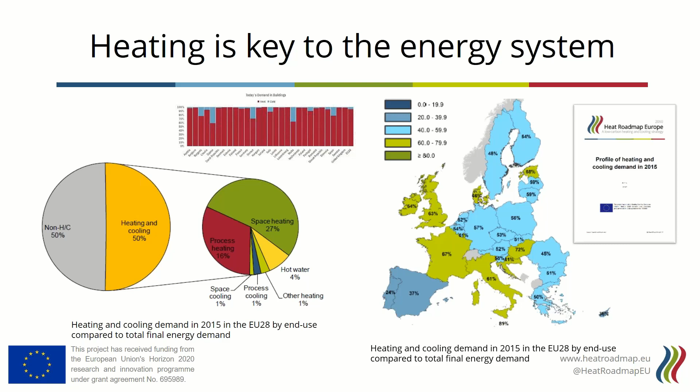When we talk about heating and when we talk about cooling, these are not regionally bound issues. These are issues that are common across the entire European Union, and therefore issues that need addressing within the decarbonization of the energy system throughout the European Union. We've worked towards that, and through different models and different methodologies, we've created these roadmaps for 14 of the European countries, and those represent about 90% of the heating demand and 85% of the cooling demand.

The main conclusion that we've really come out of that is that it is possible to decarbonize the European energy system with particular regard to the heating and cooling sector in line with the Paris Agreement. We do this using only technologies that are currently known, that are currently available, and that are used in different parts of Europe at the moment. So this is a generally optimistic message, especially in light of the IPCC report in the last few days and weeks.

This is an important finding. It's possible. We're not completely lost, and there are options available to decarbonize the heating and cooling sector. These options have a similar cost to other decarbonization factors and are more efficient than... can bring a high level of efficiency depending on how you achieve that.

In terms of the heat roadmaps, there are 3 basic pillars of the scenarios that we've developed. Because heating is local, those differ for urban areas and for rural areas. What we recommend everywhere is a deep level of energy savings in the built environment, but also in industrial processes. We'll talk a little bit more specifically about that later, but overall, we see that we're somewhere around 30% less than today in terms of space heating, which is a high reduction compared to what is currently within the policy and what has happened in the past, but is something which is in line with most recommendations towards the decarbonization of the heating and cooling sector.

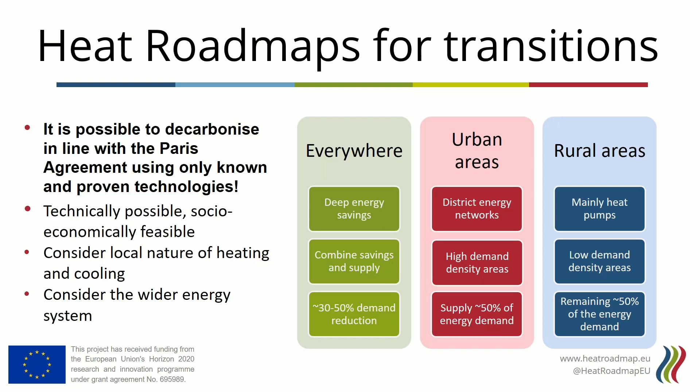So to bring that into some more detail, we'll talk today mostly about what we've broadly called the gas-dominated countries. When we talk about the current usage of gas for space heating, there's a wide range in Europe today. There are countries where there is no gas being used in space heating, and the highest level is in the Netherlands, where almost 85% of the space heat is derived from gas, and particularly from gas boilers. So we'll focus today mostly on the Netherlands and the United Kingdom, because these are the areas where the gas use is the highest for heating.

So based on these, let's talk a little bit about gas for heating. There are some obvious examples, especially in the Netherlands and the UK, where the infrastructure is very much already in place, which also means that there have been long-term investments that have been made in order to put those gas grids down and enable them to be there. These are long-term investments, and from a transition perspective, it makes sense to keep using these. Once you have the pipes, then the pipes are available.

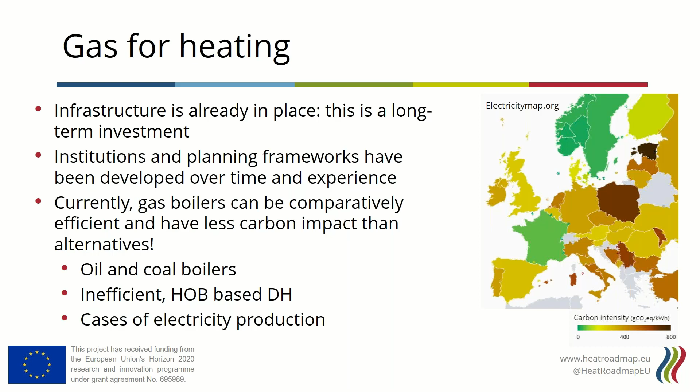So there's a good reason that gas is used in many countries, and there's a good reason that it's being considered as we move towards decarbonization. But at the same time, it's not something that in the heat roadmaps we use a lot, because there are some issues as we move towards deep decarbonization scenarios. The first is the obvious, that deep decarbonization requires us to get rid of fossil fuels to the largest extent possible, and gas is a fossil fuel in its natural gas form.

As we look specifically at the Netherlands, this is maybe not so much of an issue for other gas-dominated countries. There are extraction issues, and that's been a large part of the driver in some local cases to start looking at alternatives and start looking at different ways of providing heat. There's a large geopolitical incentive here, which rises every now and then. But in 2016, we imported 70% of the natural gas in Europe.

And as we look towards the ambitions of the Energy Union, and as we look towards the more strategic energy planning ambitions that we have looking towards 2050, then that's not necessarily something that is in line with those, especially since there's a relatively high cost to that. That money is also then leaving the European Union and could be used in other ways if we manage to keep it within the areas.

When we look at where gas could be used, and especially as we start talking about alternatives to natural gas, but in gas form, then it's important to have a consideration for the entire energy sector. What we see is that gas in deeply decarbonized scenarios becomes increasingly valuable. There are a lot of industrial processes where gas is necessary. There are not as many alternatives available as there would be for the heating and cooling sector, and where it's more difficult to find substitutes or technical alternatives that are possible.

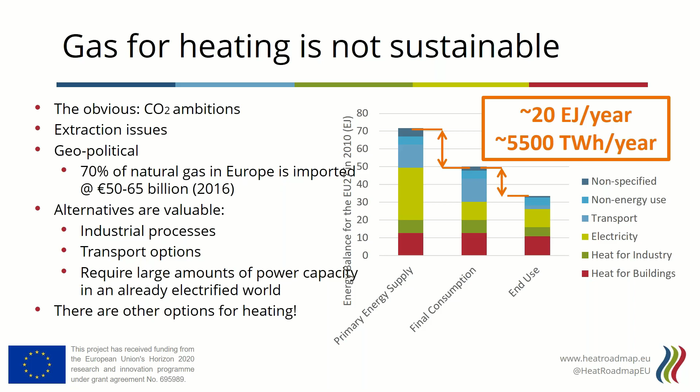So these are the kind of considerations that we have towards gas and towards gas-based systems as we start looking at heat roadmaps for these gas-dominated countries. To give a bit of the background on the methodology that we've used, we use 4 different types of energy models. And the reason we do that is so that we can combine very specific knowledge on the built environment, which is a fundamental part of the heating and cooling sector, in the sense that that is where a large part of the demands take place.

For industry, similarly, heat for industry can be very varied, both in temperature, in terms of what the use is, and also in terms of temporality. So we have a relatively detailed description and profile of what the different types of energy demands are for heating and cooling. This is available also as one of the outputs of our project, and the whole data set is available and can be downloaded.

The second element that we include is a spatial disaggregation of the different heating and cooling demands. Because heating is so local, and because it's something which is particularly infrastructure heavy, it's important to be able to look at where the energy demands are and where the resources for heating and cooling are, and to really be able to look at those on a granular level within regions, within cities, and within areas, to be able to make those links between the two.

This is especially the case when we start looking at different types of renewable energies and excess sources for district heating. So through the Peta map, the Pan-European Thermal Atlas, we have a hectare level disaggregation of the heating demands and also some local identification of where excess heat sources are and where renewable sources like geothermal and solar thermal might be. Again, this is available online. There's a link at the end of it.

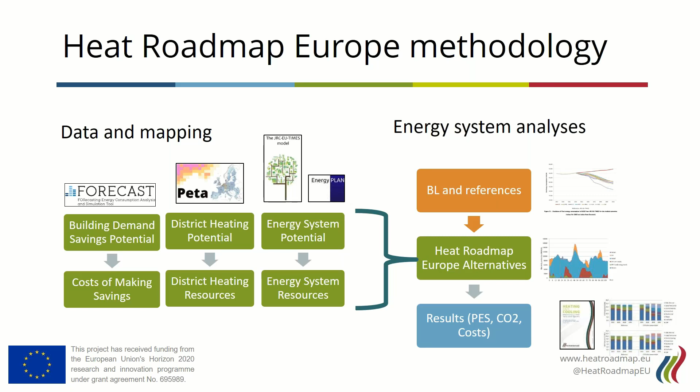Those different things are combined. We've created some baselines and some scenarios that we can compare the heat roadmaps to. And through that, we've created these Heat Roadmap Europe alternatives. So this is how we've approached it from a methodological point of view. Based on this, as I mentioned, we've made these 14 heat roadmaps, and we'll discuss a little bit today about the main ones where we talk about really the gas-dominated areas.

So to break it down back into those 3 pillars that we discussed earlier: the energy savings, the supply options in the urban areas and the supply options in the rural areas. For the energy savings, we can see that there's a serious reduction in heat demands, particularly within space heating demands. I've put them here for the Netherlands and for the UK, but even under the current policy initiatives, which you see in the middle bar, there's a significant decrease in the space heating, particularly as we move towards 2050, if you compare it to the 2015 level on the left.

This is not so much the case for cooling. Cooling expands in most cases, also even in these kind of Northern European, Central European areas. And we see that process heat is something which is very difficult to address in terms of really making hard energy demand savings.

When we look towards the heat roadmaps, then you can see that there is a decrease, particularly in the space heating, but also in the process heating. But it is not possible to completely make the energy demands disappear. Savings alone and energy efficiency on the demand side alone will not be able to decarbonize the heating and cooling sector, simply because it's not possible to completely eliminate these kinds of demands. So there also needs to be a solution towards being able to supply this heat.

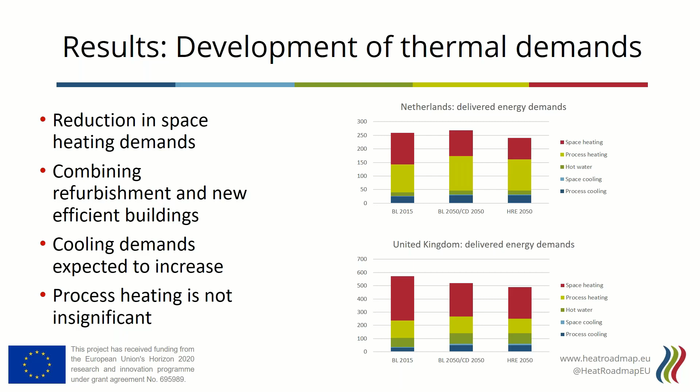Now, because space heating is such a relevant part of this, and because this is where really the most savings are made as we talk about refurbishing buildings and building high energy performance new buildings, we've broken this down further. I've got them here for the Netherlands and the UK, but also some other countries where we have a high level of gas. And if we compare that to, again, the current policy as it's projected to be towards 2050 in the form of the red bar, and what we recommend in the Heat Roadmap Europe scenarios in the blue bar, then there does need to be a focus both on the ambitions of the heat savings that we make in space heating, but also on the implementation of these savings.

What stands out particularly for gas countries is that compared to the other countries that we've analyzed in this project, there's a relatively lower level of ambitions for the energy savings. In some countries, that's because there have already been a lot of efforts. So the current policy recognizes that a lot of this happened in previous years, and the easy-to-make savings have already been made. But at the same time, the ambitions need to rise in a lot of cases.

For the Netherlands, you can see that the current policy projections are that there would be about a 20% level of savings, but really, from a socioeconomic perspective, we're looking at something which lies above a 30% level of savings if you compare the space heating demand from today to what we're looking at in these future scenarios. In terms of how to achieve that, that basically means higher refurbishment rates, so more houses and buildings being refurbished every year, and a deeper level of renovation and refurbishment when that does happen.

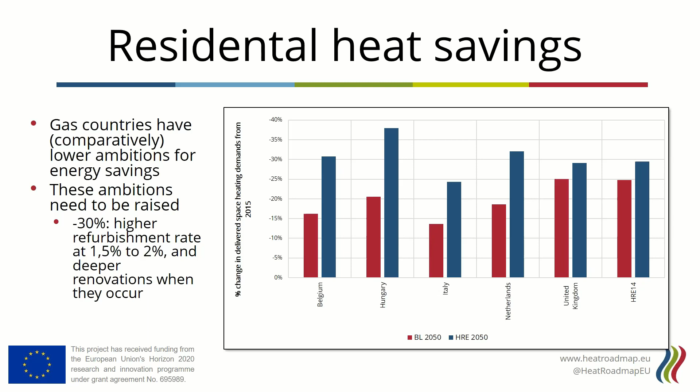But this is something that underpins a lot of the energy savings that we find because space heating is so dominant in a lot of the energy systems and the heating and cooling systems that we see. So this is the first step when we look specifically at gas dominated countries and the scenarios that we've built in these heat roadmaps for the gas dominated countries. The second element is then how to supply that remaining heat.

And for that, in the urban areas, we find that district heating is mostly the solution which can provide the most efficiency at the best cost. And in rural areas, we look mostly towards heat pumps, again, because they have a very nice connection with the electricity sector that helps further decarbonization, but also because they can very efficiently use renewable energy that is being produced there. So overall, for the Heat Roadmap Europe 14, we find a level that approaches half.

You should be looking for the little green triangle, which sits within an interval where the costs don't change significantly. So they change about 0.5%. So that range is really what we're looking at to be able to decarbonize in an efficient and socioeconomically feasible way. We break that down specifically for these gas-dominated countries, and we can see that there are a lot of differences. In the Netherlands, we're looking at over 50%.

Italy is one of the highest ones that we see throughout the Heat Roadmap Europe 14 countries, at approaching 70%. For Hungary, we see that it approaches 20%, which is actually more than is currently in place there. And then for the UK and Belgium, we're looking at somewhere between 30 and 40%. Now, these figures are much higher than is currently the case. If we look at the whole of Europe, then the level of market share for district heating traditionally has been around this kind of 10-12%. In some countries it expands, in some countries it decreases.

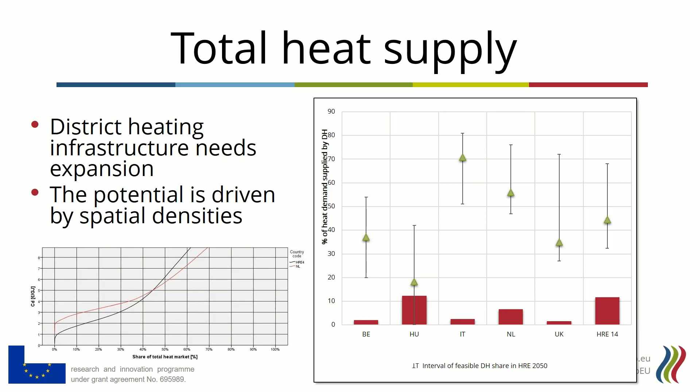And because heat pumps are a form of electrification, there's also an infrastructure implication there when we think about the electricity grids. So these are the general ways in which we foresee the heat being supplied when it is no longer supplied by gas. I think it shows well both how heating is based on a local analysis and how that local element of heating is necessary, but also how the energy system analysis comes into place as we start looking at electrification.

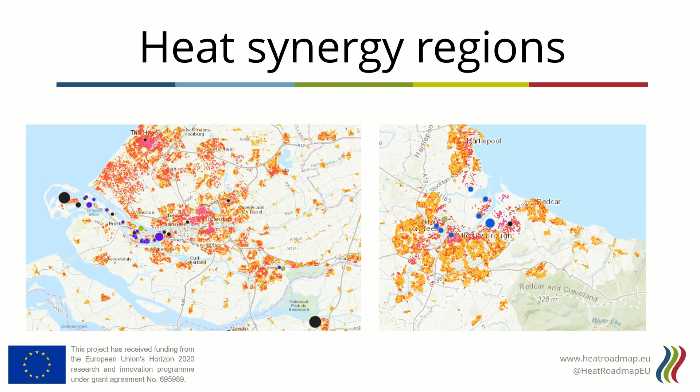And again, these are available, you can have a look at them. But I think they really nicely show this idea that there is, on the one hand, an amount of excess heat available, and on the other hand, demands which are currently being met by gas, which is, as explained, problematic, but could be provided in different ways.

When we look at the heat roadmap scenarios and the way that we envision supplying the district heating in that, one of the main differences compared to how district heating is supplied today is that we see a much larger variety of sources. So there is still a lot of energy coming from cogeneration, the combined production of heat and power.

This is mostly due to the demands of the electricity sector. So this isn't necessarily the production of heat because the district heating system needs it, but really the true recovery of heat as it is being used in power production, and the idea that it's an excess product of the electricity production, which is still necessary. It's mostly based on biomass. In the UK, there's also some gas still in the CHP plants, but this is again more driven by the needs of the power sector than necessarily by that of the heating sector.

We see higher shares of heat pumps. If we combine the heat pumps in the individual provision of heat and within the district heating system, then it's the majority of heat. The main way in which we supply heat then becomes through heat pumps, although they're not all in an individual application, but many are also within this district energy application. And between the heat pumps and the combined heat and power, there's a really nice interplay with the power sector, which really starts to form a fundamental part of how we then decarbonize not just the heating and cooling sector, but the energy system at large.

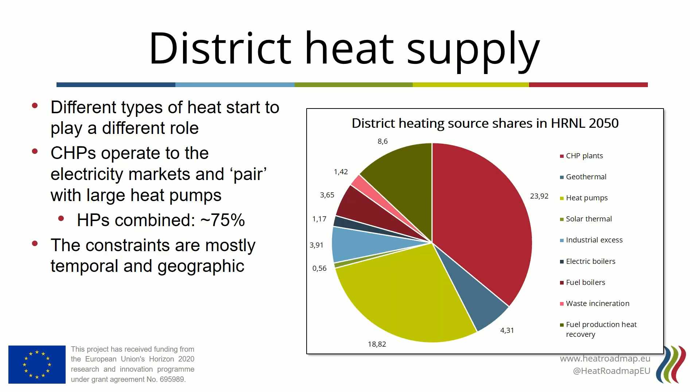And this then links these shares, but also the planning processes that should be behind this as we move towards this transition, to the spatial nature of the heating and the way that we use the local geographies of the area, not only on the demand side, but also on the supply side.

So combining these, the rough findings, to put it shortly, are that it is possible to decarbonize in an affordable way. We find that it's about 6% cheaper than if we compare it to a conventional decarbonization. It's very strong to say that it's much cheaper, because when we project towards the future like that, 6% is not enough to really be sure to say that it will be cheaper and that it is fundamentally cheaper. But it does provide strong evidence that it will be within the same realm of cost, and that it's a viable alternative and something that has to be considered.

When we look at the energy efficiency of it, then there's about a 10% reduction in primary energy. And as we said, this becomes very important as we also look at the power sector and also look at the transport sector. The idea is to decarbonize not just the heating and cooling sector, but decarbonize it in a way that facilitates a decarbonization of the entire energy system. So that's really an effect of being able to use a lot of these sources of heat that are otherwise being wasted or otherwise unavailable, and at the same time also have these heat pumps provide a very efficient way of producing heating and cooling, using the resources to their maximum.

If we compare it to other different types of scenarios, particularly this baseline that we created and also a conventionally decarbonized system, then there's a reduced peak on the electricity, a reduced pressure on the electricity sector as we move away from full electrification. There's a lot of things here. But we see that the heat roadmap that we've designed here and that we simulate here, using the amount of district energy in it that we use, decreases the pressure on the electricity sector compared to a full electrification scenario.

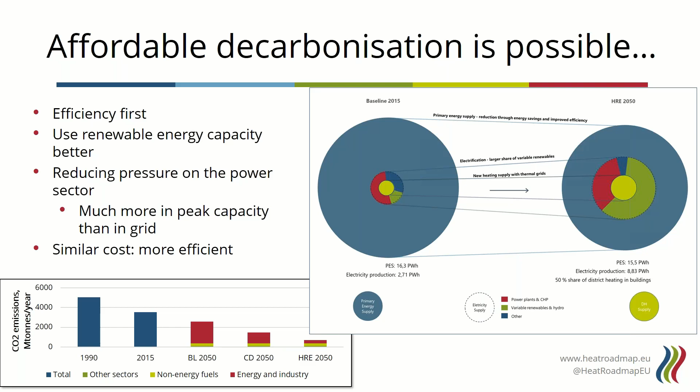And then this comes through in the electricity sector, which you see in the three colors encompassing the district heating supply. There's a much higher level of variable electricity in it, both in terms of wind, but also in terms of solar. And then the amount of electricity that's produced via power plants and CHPs reduces. However, when we look at the heating and cooling sector again, this means that there's a lot of change that's necessary.

And the idea is that if we can put the infrastructure and the elements into place that can enable this growth in renewable shares, those will follow, because we need to start using those renewables on the one hand in the electricity sector, but also in terms of supplying the district heating infrastructure with energy that is low carbon, decarbonized and sustainable.

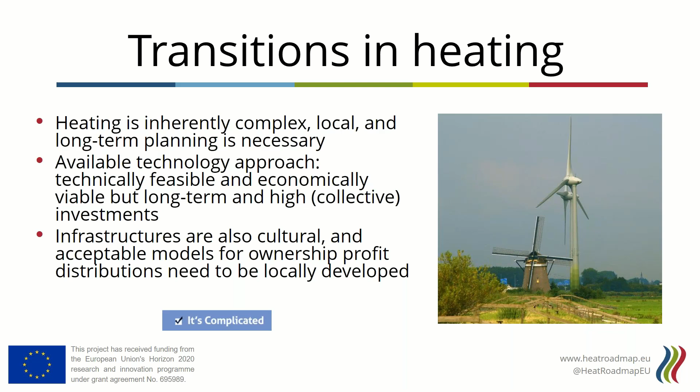For infrastructures, that's always an issue, but especially as we're transitioning from one type of infrastructure to another, those are things that need to be discussed, solutions that need to be found, and market models that need to be created within the context of these local conditions and local assumptions. So hopefully that's also something that we can discuss during the remainder of the webinar. Before we move to that, I just wanted to point out the resources that we have.

And then we have the demand profiles available, which, especially for the gas countries and especially within the context of looking at what kind of future roles gas can play, are interesting because it breaks it down not just by what the energy carriers are, but also where the energy is being used and where the energy carriers are used, including the industrial sector, which makes it really interesting to look at and see what the totals are and how the relative numbers count up together.

We have a specific document on market uptake approaches, including an outlining of barriers and case studies as we look towards implementing these different kinds of infrastructures to decarbonize the heating and cooling sector. And then a blast from the past, we have a YouTube video about natural gas versus district heating in urban areas. It's a few years old now, and it doesn't include these latest results. It's based on the Heat Roadmap Europe 3 iteration and the results that were there.